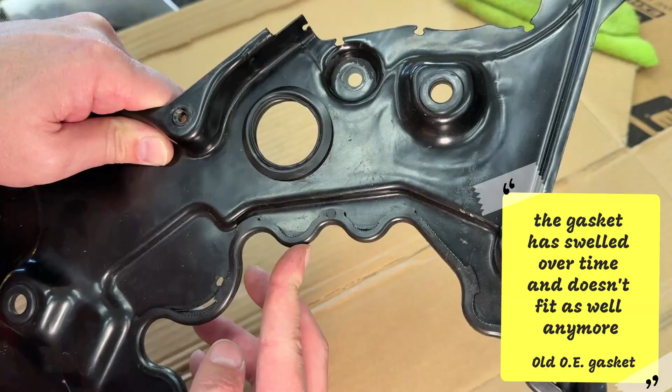For the installation of the seal plate, I initially intended to use the original equipment seals since they seem to be in good condition. However, I've noticed that the bottom gasket has swelled larger than usual and does not fit properly anymore.

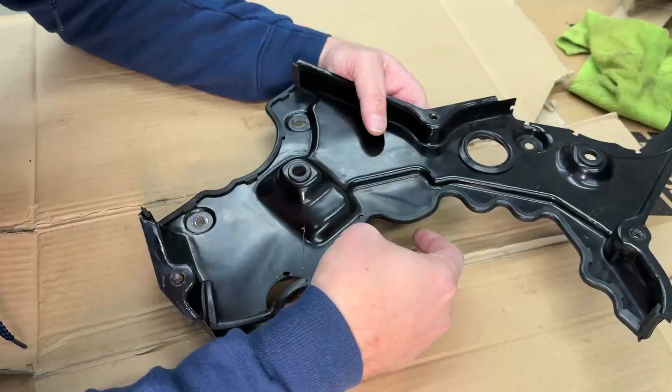I was hoping that pulling the gasket would make it shrink back down to its normal size, but unfortunately it did not change much at all.

I have decided to replace all of the seals since they are reasonably priced and easily available at my local dealership.

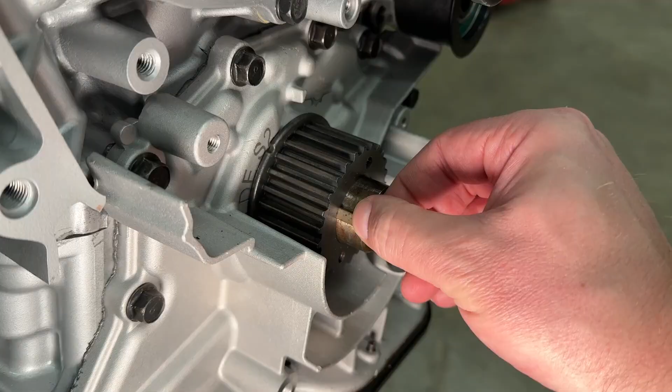The pulley key didn't fit tightly enough. To fix this, we used a punch to make small indentions so that it would fit snugly and it would not move around.

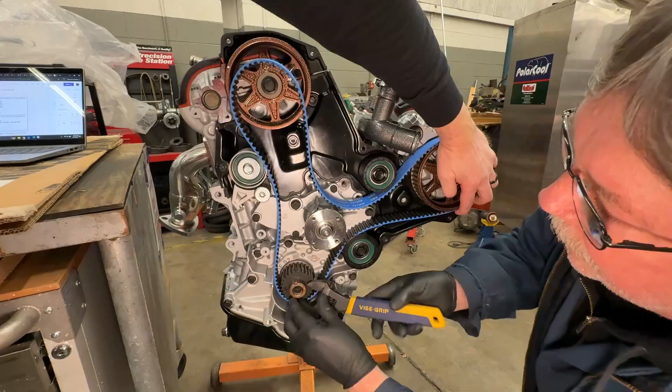We are slightly turning the crank gear counterclockwise to align with the teeth on the belt. Our goal is to remove the slack from the timing belt.

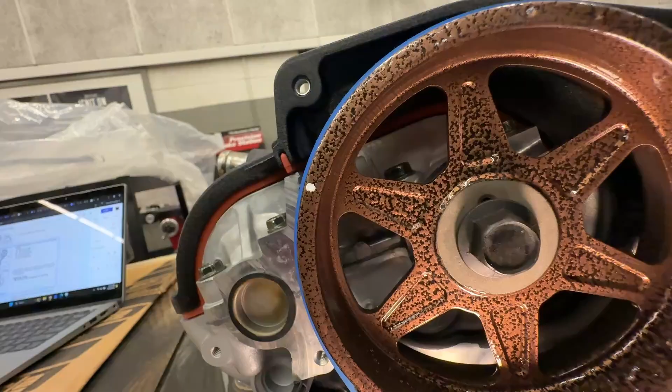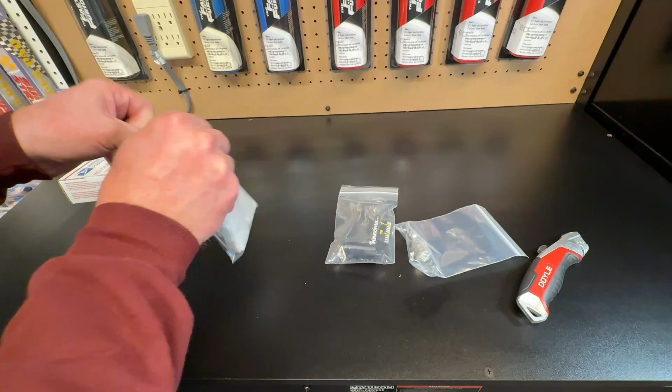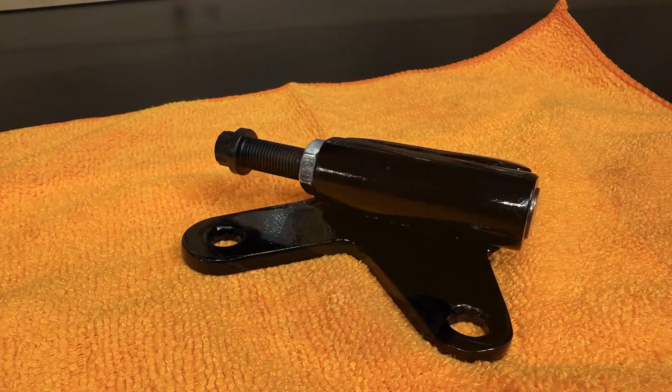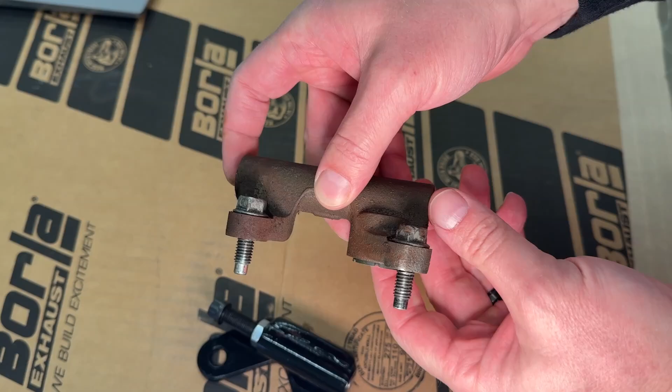After checking all the timing marks again, it seems that everything is still lining up. The original equipment bolts are just a little bit too long for the King 6 tensioner.

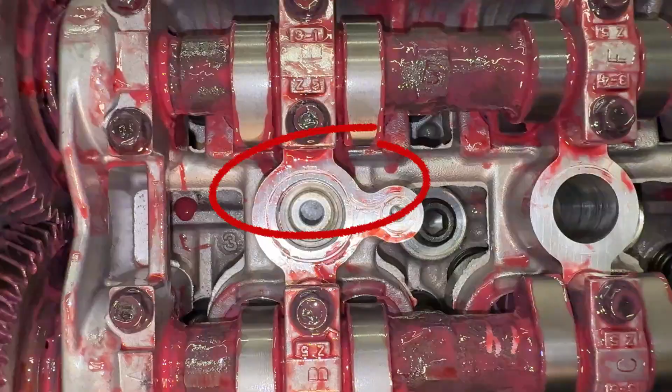For this demo, you can look into the spark plug hole. You can see the piston moving up to its highest point called top dead center. As you change the timing, the piston starts to move down and the exhaust valves open. When the piston goes up again, the exhaust valves will close.

During the piston's next downward movement, the intake valves open. After the piston reaches the lowest point, the intake valves close and it starts to move up again. When it rises to the top once more, a spark ignites the fuel-air mixture, pushes the piston back down, and this process continues.